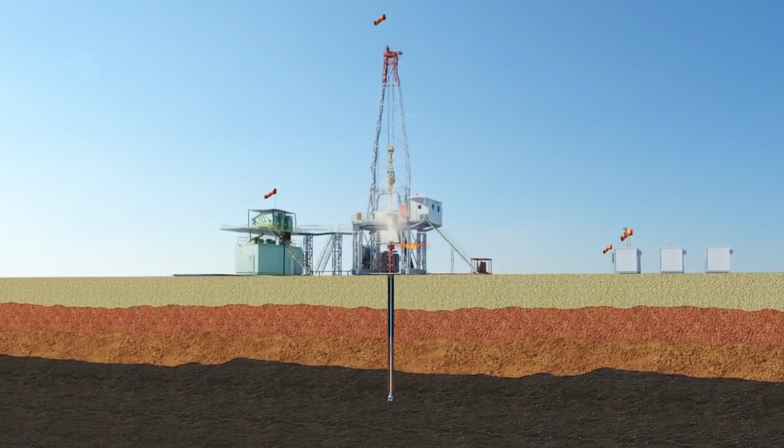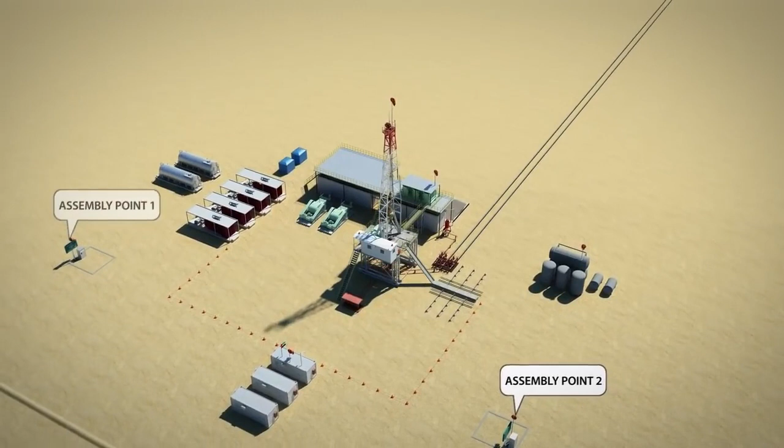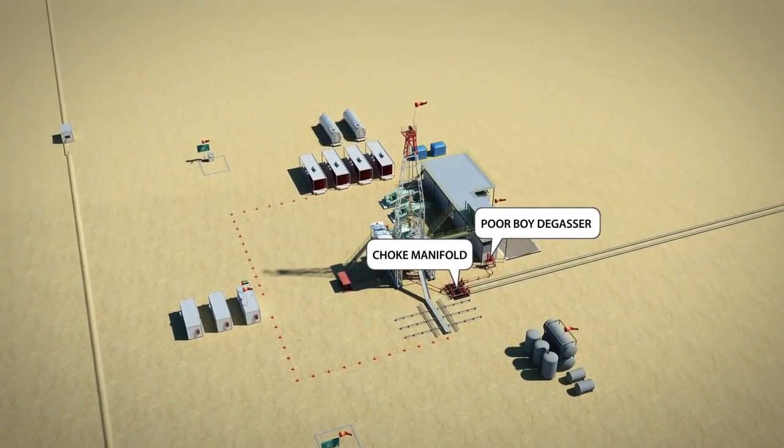We will be sharing with you some information on well control during drilling, the various systems put in place to control a well and prevent a blowout incident from occurring. We will also review the main reasons behind some of ADCO's well control incidents which were handled successfully.

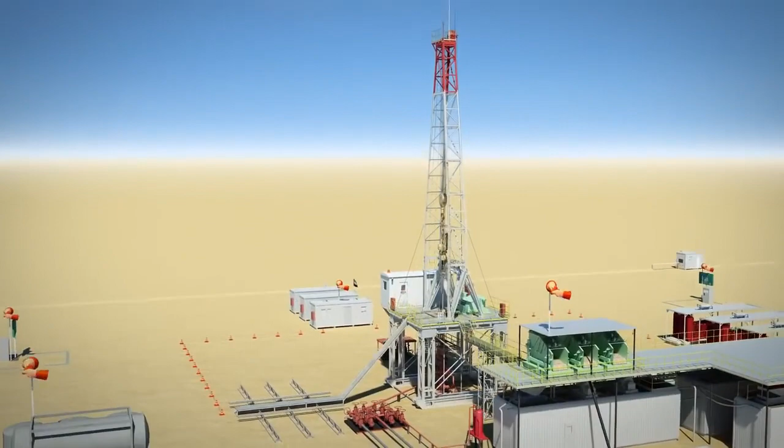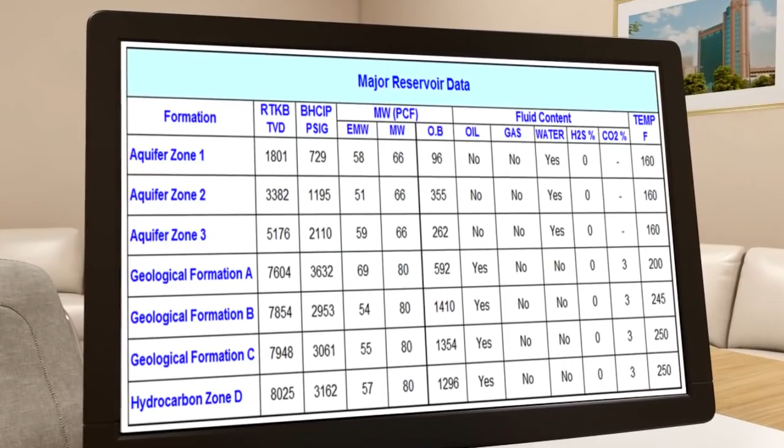Prior to the preparation of the drilling program, the asset development team submits the final well prognosis to the drilling team. The well prognosis is initiated by the petroleum engineer. The reservoir engineer then makes a planning overview and provides the required formation pressures and temperatures. Then the following data is completed: geodetic data,

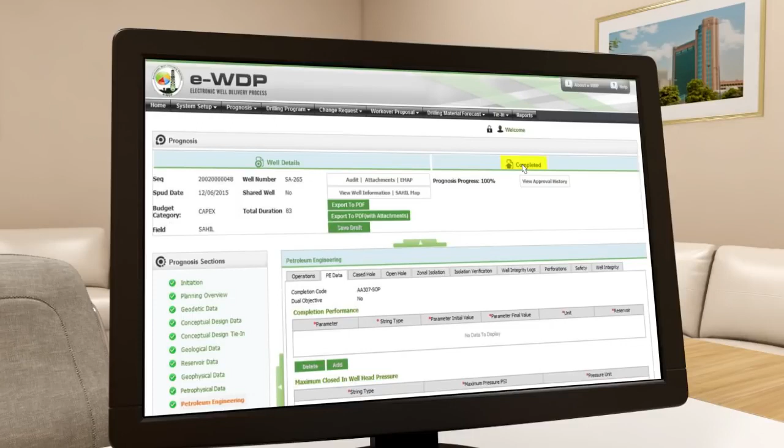conceptual data, geological data, reservoir data, geophysical data, and petrophysical data. Once all the data is entered, the well prognosis will be approved by the Reservoir Operations Asset Team Leader and will be published in ADCO system.

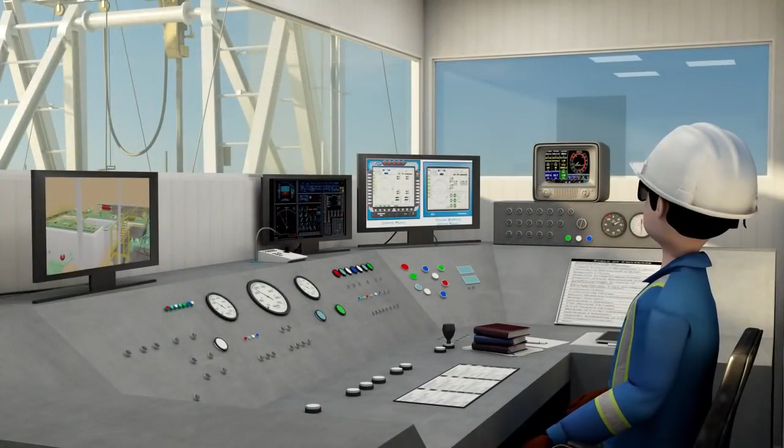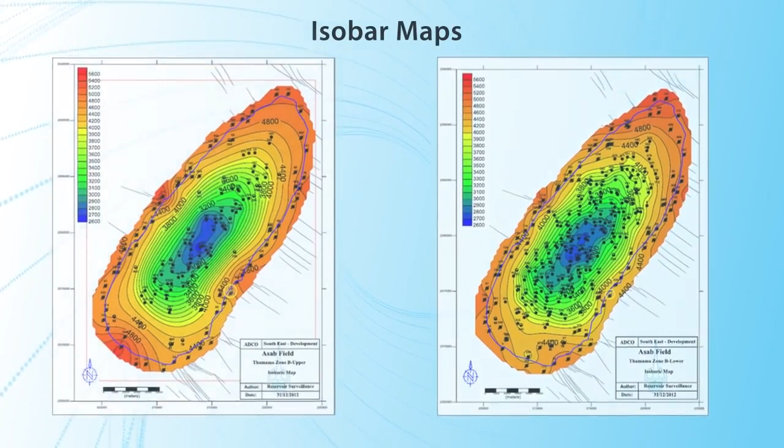Let's begin by explaining well control. While drilling, it is essential to perform activities in a safe way, which will prevent uncontrolled flow of formation fluids and gases from the reservoir to the wellbore and surface surroundings. This is called well control. This includes measures, practices, procedures,

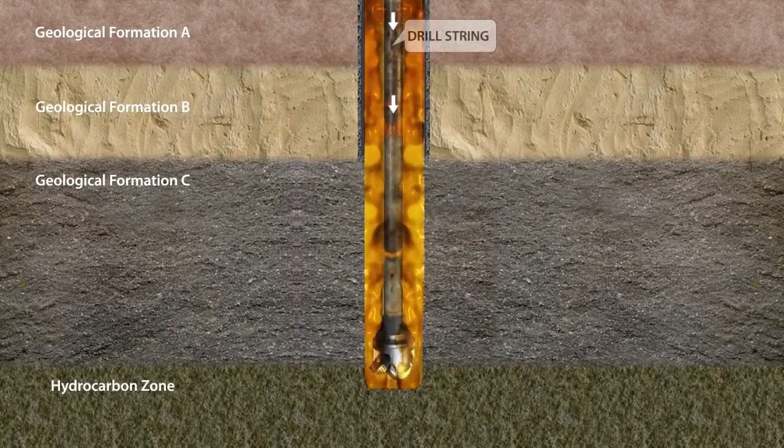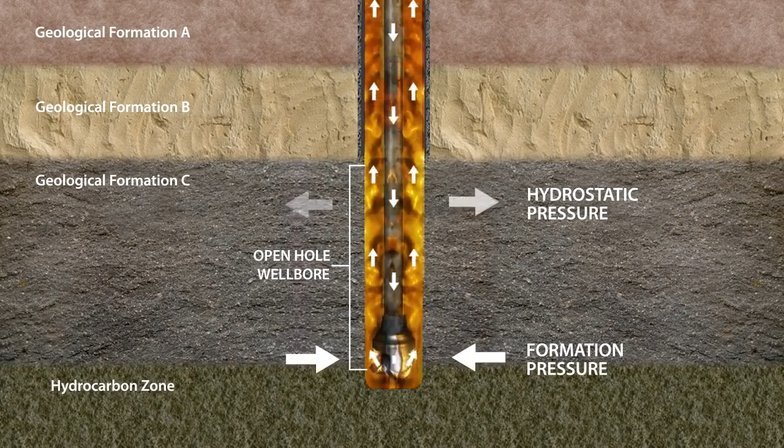and equipment, workover and completion, as well as the installation, repair, maintenance and operation of surface well control equipment. It also consists of well control barriers, which are divided into two groups: primary and secondary barriers. The primary well control barrier is the fluid column hydrostatic pressure, referred to as wellbore pressure, that provides overbalance against the formation pressure. This column must be monitored and maintained during drilling and tripping to prevent formation fluids from

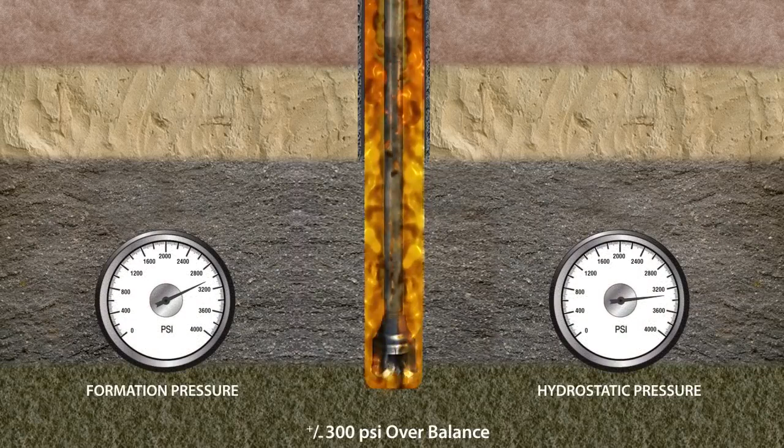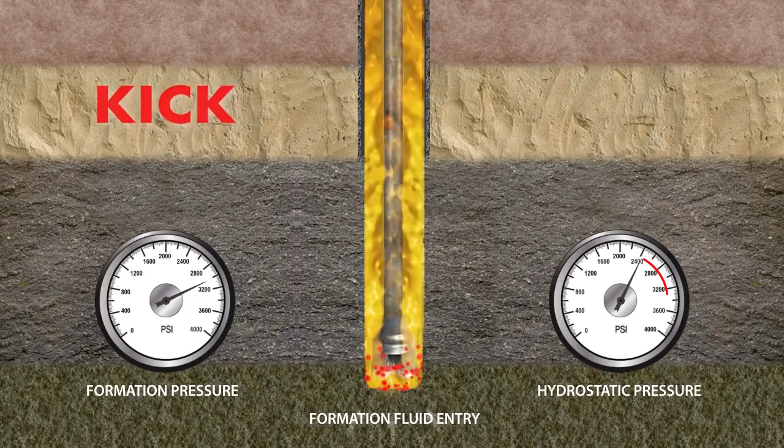entering into the wellbore. During drilling, if the fluid column is not maintained with adequate mud density, making the formation pressure more than the hydrostatic pressure, formation fluids will find a way into the wellbore and a kick will occur. In this case, the well must be secured and killed. There are other cases when a kick can occur. Let's review some of them.

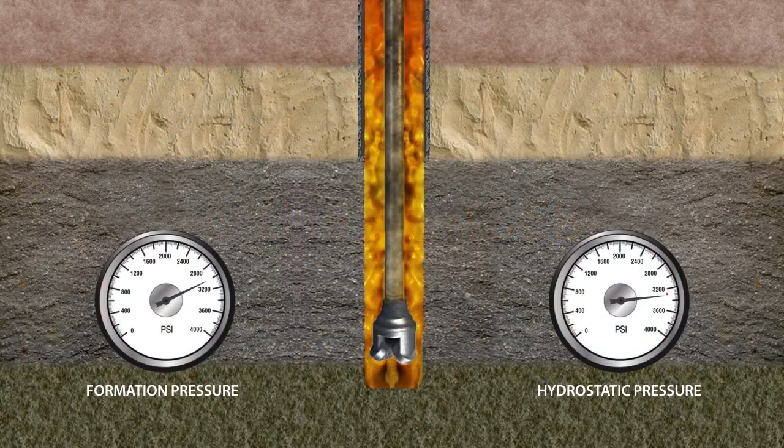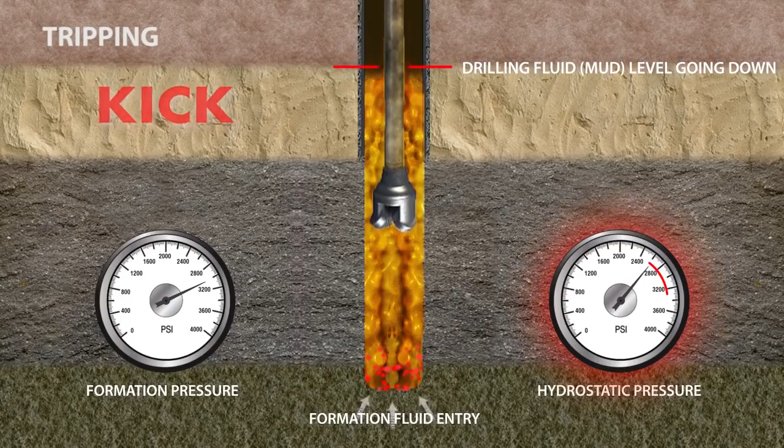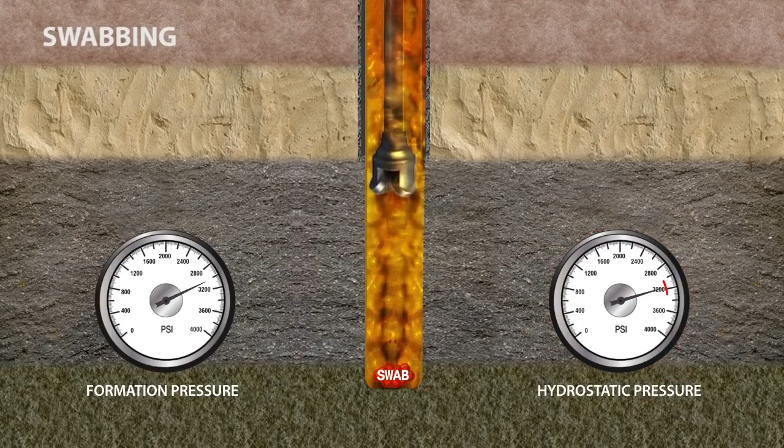While tripping, if there is a failure to keep the hole full of mud to maintain adequate hydrostatic head, then the hydrostatic pressure will be less than the formation pressure, inducing a kick. Swabbing while pulling out of a hole too fast can produce a suction effect, resulting in a decrease in the bottom hole pressure large enough to allow formation fluids to enter the wellbore, creating a kick.

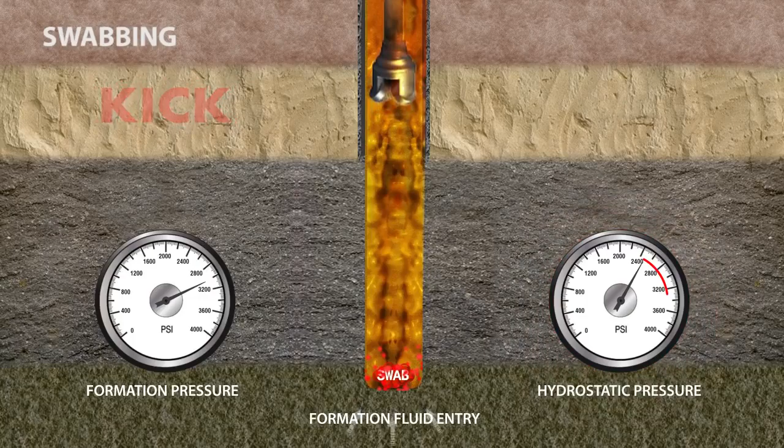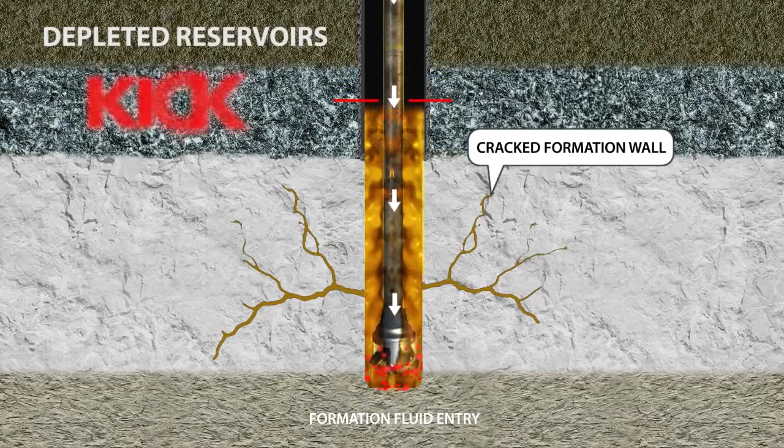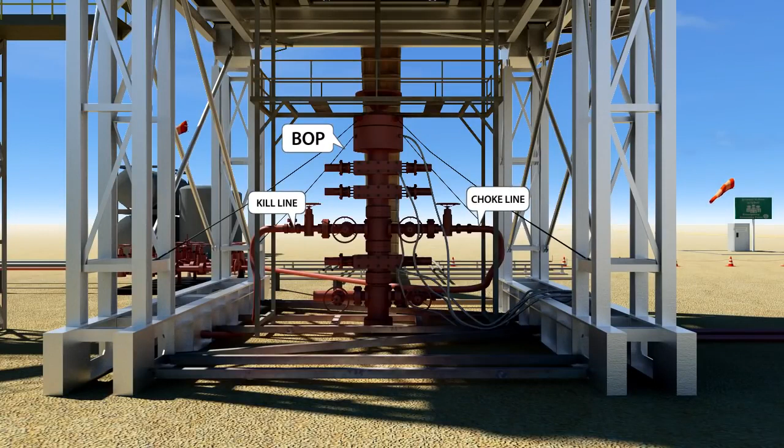When drilling takes place too fast and into depleted reservoirs without proper reinforcement, it can lead to cracking in the walls and thus losing fluids into the formation, inducing a kick. Once a kick is detected, the secondary well control barrier, blowout preventer, BOP, must be activated immediately by the driller to secure and shut the well for killing operations.

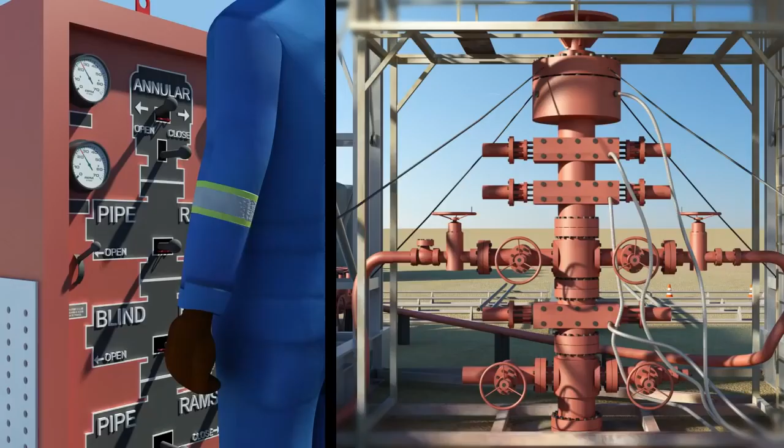This is done by closing the BOP using one of the BOP control panels, one situated on the rig floor and the second situated in the Koomey unit. The driller will shut in the blowout preventer to stop the flow of formation fluids out of the wellbore. Then, he will activate the alarm and notify ADCO drilling supervisor and rig manager.

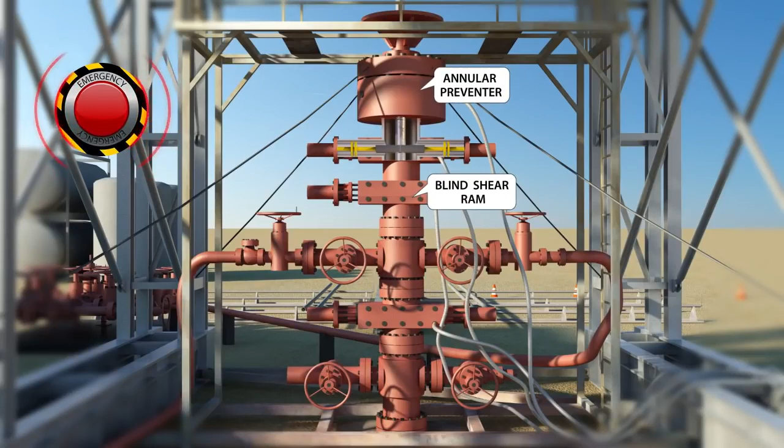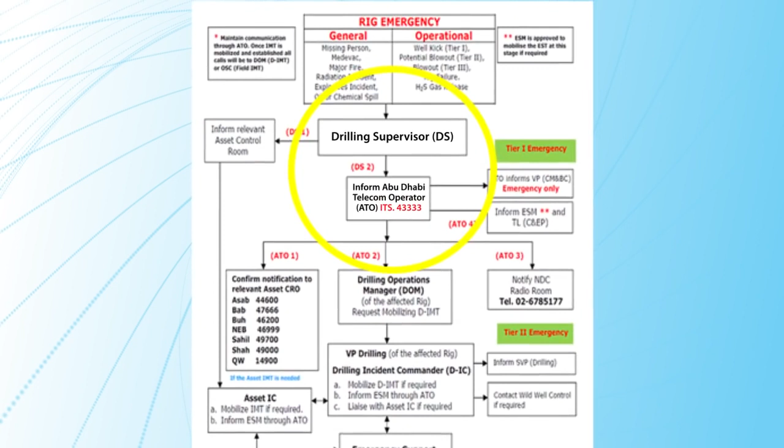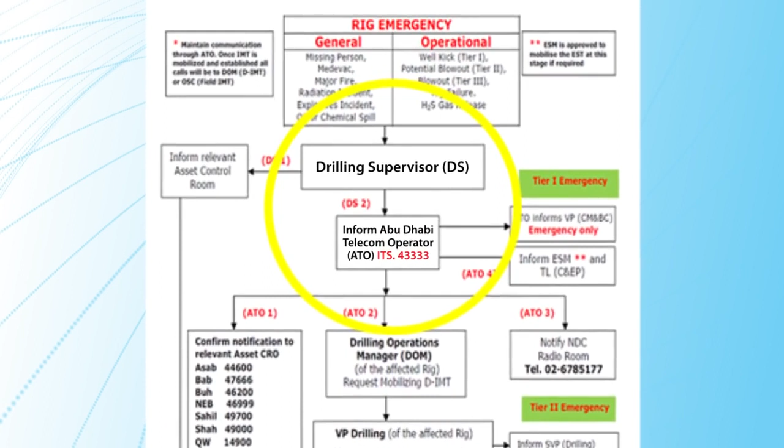Meanwhile, at the rig site, the on-scene commander, ADCO drilling supervisor, will notify Abu Dhabi telecom operator and relevant assets control room and raise emergency Tier 1, which activates appropriate emergency response teams. Unnecessary crew will be evacuated to the nearest assembly point. The next step will be to monitor the shut-in drill pipe and the shut-in casing pressure gauges.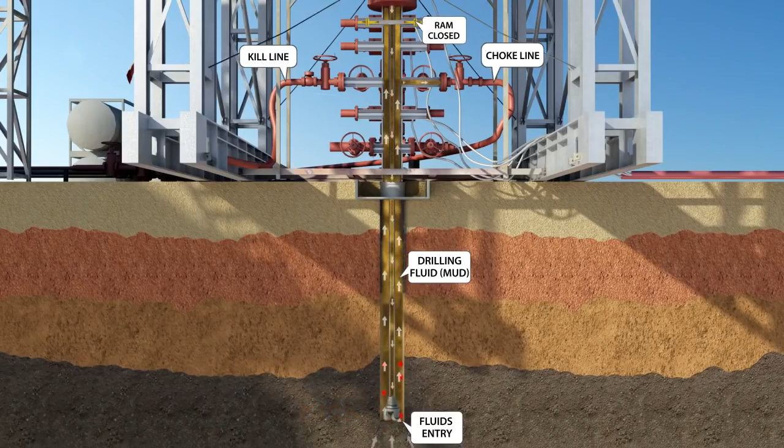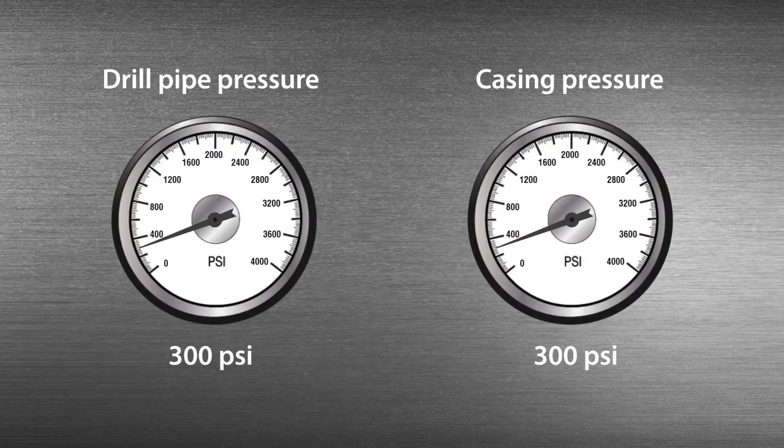The kick will be circulated out of the wellbore using the driller's method first cycle by pumping drilling fluid downhole and getting returns from the annulus through the choke line to the choke manifold, and the poor boy degasser, and toxic gases will be flared. Once the kick is out, the well will be shut in. Then, the well will be killed with weighted mud by circulating the kill fluid until both the drill pipe and

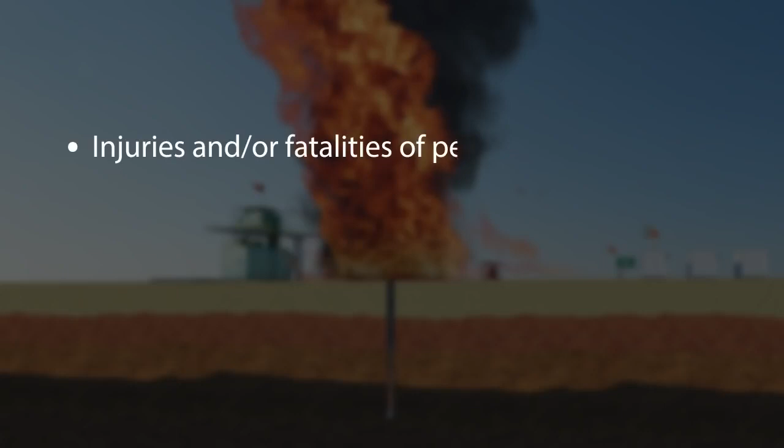casing pressures reach zero. If all of the well control barriers failed, such as human barriers, BOP equipment barriers and system barriers, and the BOP leaked while circulating the kick out, this could lead to uncontrolled flow of formation fluids and possibly a blowout. A blowout has massive catastrophic consequences, such as injuries and/or fatalities of personnel, release of toxic gases, pollution of the environment, asset damage, and damage of ADCO's image and reputation.

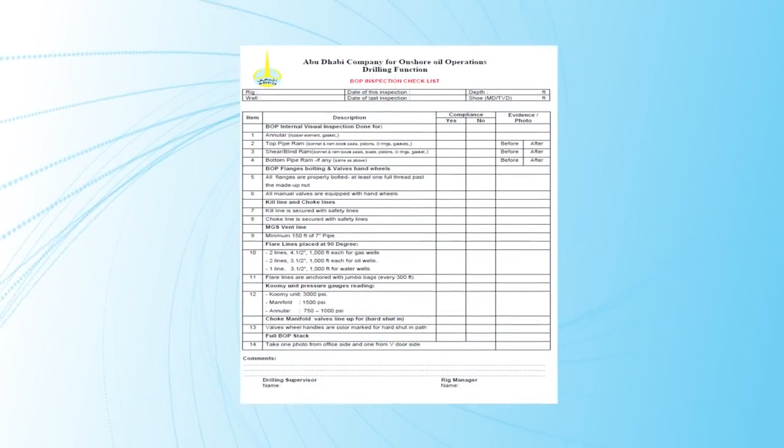ADCO strives to create a safe and incident-free working environment for all. This is why strong well control integrity assurance systems have been put in place. These include policies, standards, procedures, people competency, and equipment. Despite all of this, ADCO has experienced several well control incidents, which have been managed and controlled successfully, preventing a blowout.

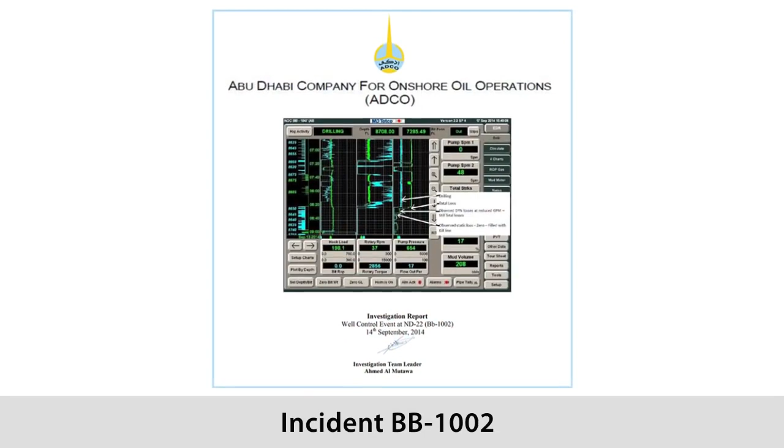After sharing with you the primary and secondary well control barriers, we will now share with you some of the main causes behind ADCO's major well control incidents. No implementation of top 3 concept: plan, what if, competent people; incorrect formation pressure and drilling fluid weight; failure to implement management of change procedure whenever there are changes; failure to maintain BOP equipment.

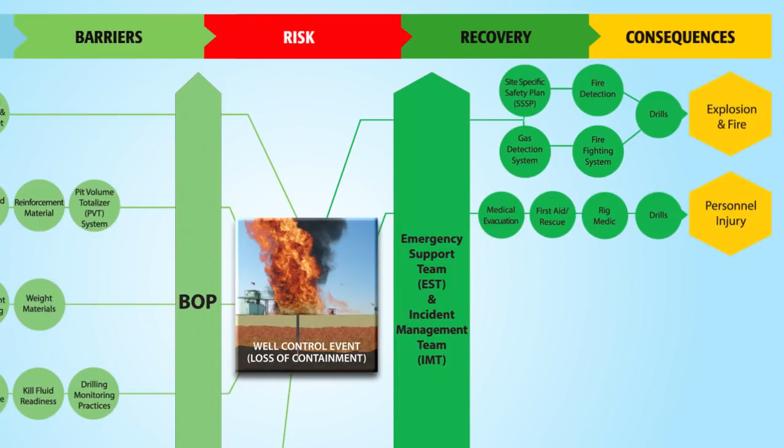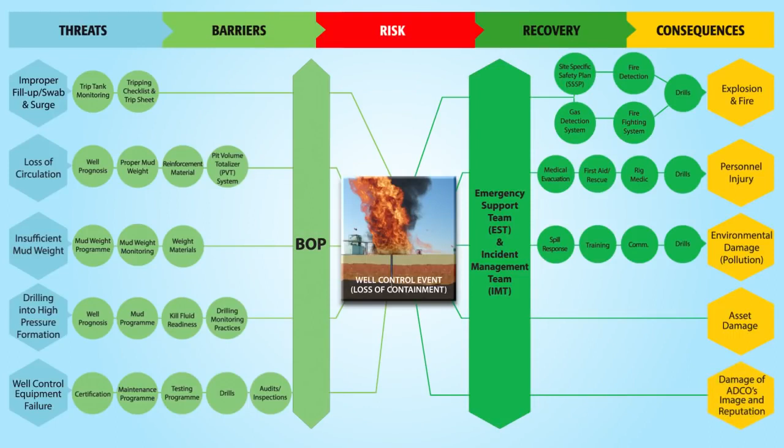Learning outcomes from such incidents include: ensure every drilling operation begins with the discussion of the top 3 concept. Always use updated reservoir pressure data for defining drilling fluid weights. Make sure that any change in the drilling plan is governed by an approved management of change process. In case of well control, shut in the well immediately as per ADCO procedures and consult your supervisor.

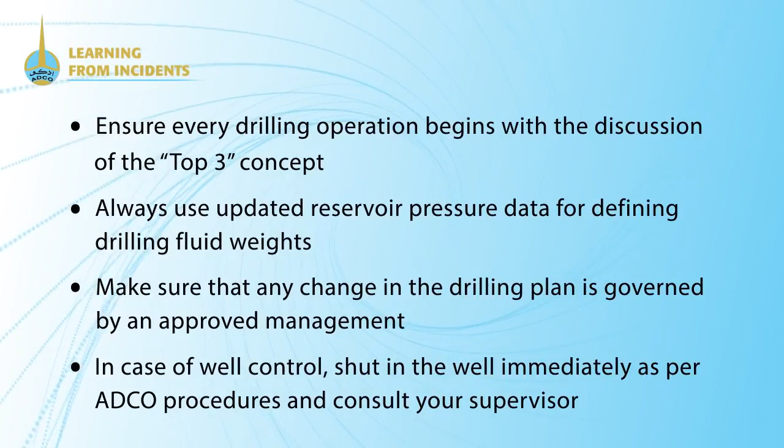In conclusion, well control incidents must be avoided by all means, as they can lead to blowouts which have catastrophic impacts. At ADCO, we expect from all the well drilling stakeholders to ensure 100% full implementation of ADCO well control integrity assurance systems. It is the responsibility of all managers and supervisors, both in the office and at the rig site, to verify and enforce the full compliance of these systems to avoid catastrophic incidents from happening.

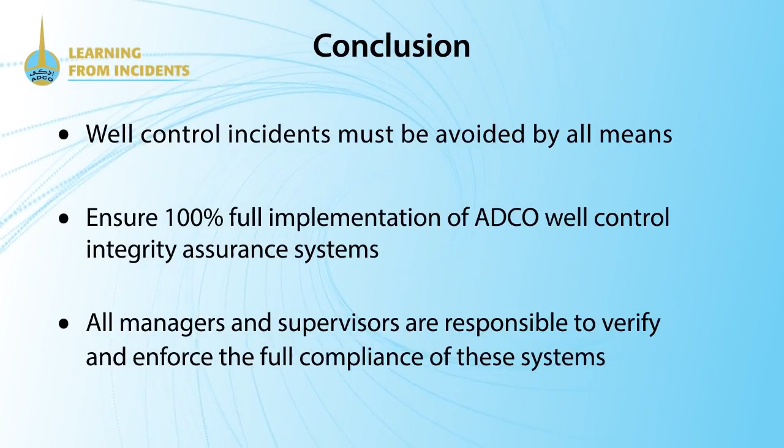With your continuous dedication, compliance to ADCO procedures, and your full commitment, we prevent well control incidents from happening in ADCO. Thank you for your attention.